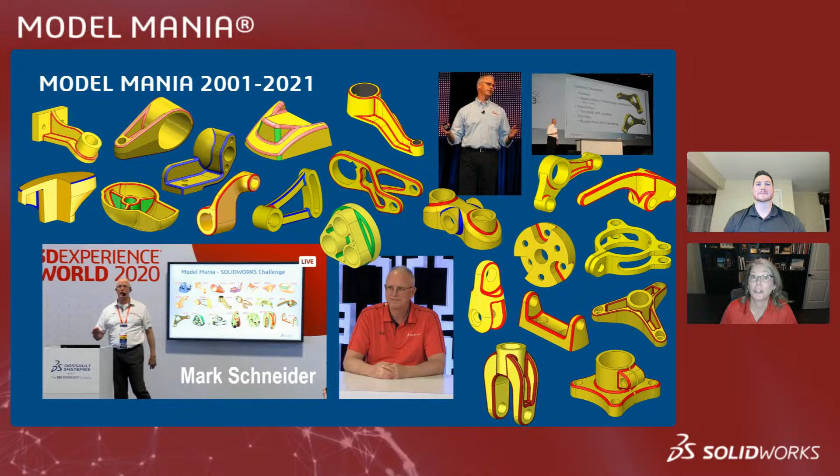Here's an example of one of the drawings that Mark created. We've got phase 1, showing what it looks like at first. Then as soon as you're done with that, you get the scary phase 2, where you have to go make a change and make those edits to the model. It was a lot of fun and fantastic. At the end of 2021, Mark retired and turned the reins over to me.

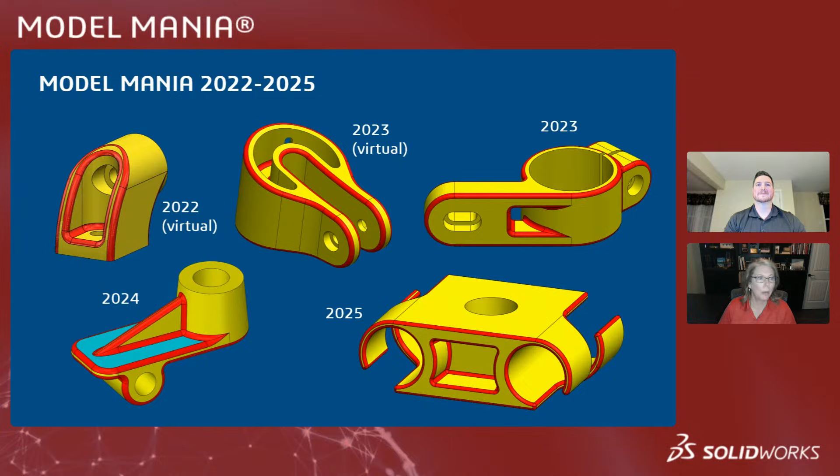So these are the models we've had over the past few years. We've continued on with Mark's system of having users and resellers categories. And this year in 2026, we're adding a third category for students. So if you're a student in university, college, or even high school, and you want to try Model Mania, you'll be competing with your peers. We're excited for that.

I thought I'd give a quick shout out to last year's winners—these were the winners of the 2025 challenge. Just as a reminder, you get cash prizes by taking the Model Mania challenge at 3D Experience World in person. We don't have cash prizes today, but if you attend 3D Experience World, you could win there. I thought I'd show a quick shot of the booth at 3D Experience World last year in 2025—this is before things got wild and all the customers showed up.

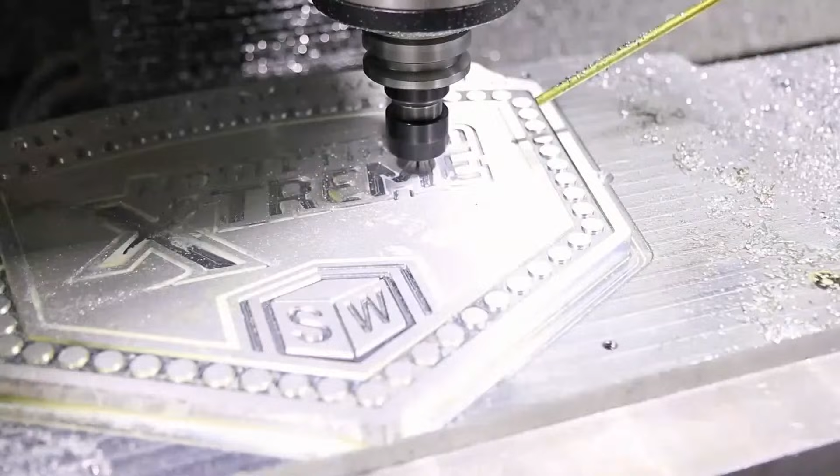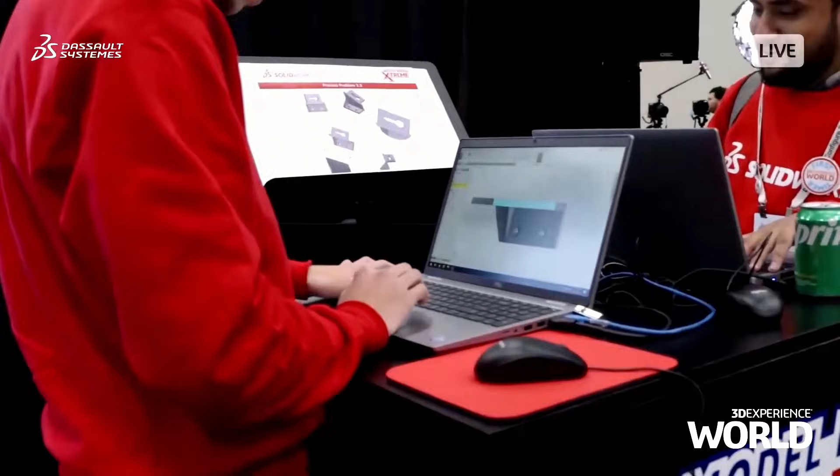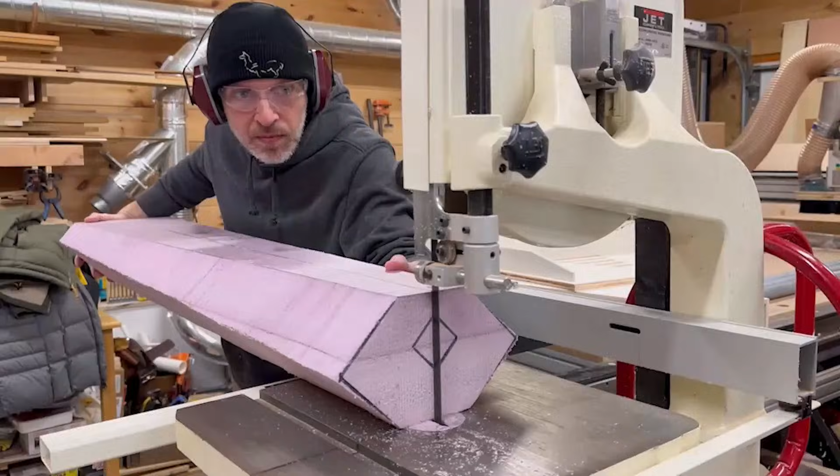Live at 3D Experience World 2025 in Houston, Texas: Model Mania Extreme! Powered by xDesign, designers step into the ring to go head-to-head in epic speed modeling challenges. Users, partners, and experts battle in CAD using SOLIDWORKS design tools. Winners earn their moment of glory, flaunting the Model Mania Extreme Championship belt. The ring was imagined in SOLIDWORKS xDesign, sponsored by SendCutSend, and brought to life by the talented, passionate team at Our Next Make. I promised if I ever met you, I would control, delete you. Oh, let's get ready to model!

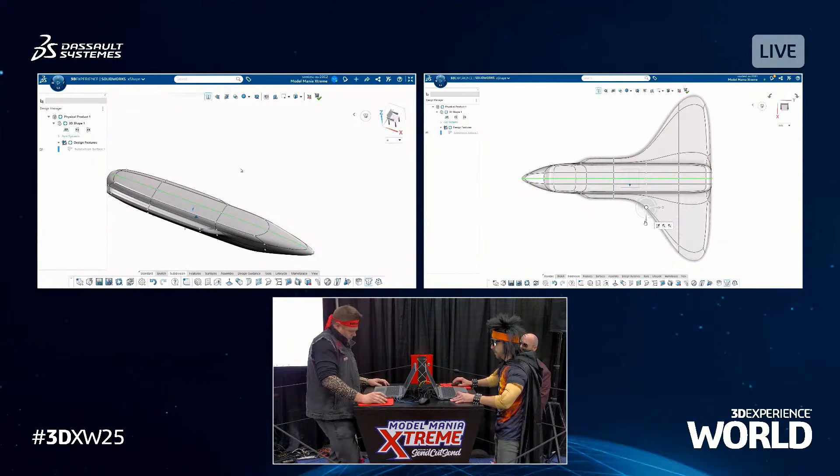Heavyweight surface modelers went head-to-head in the Sub-D showdown. These experts battled using the freeform subdivision modeling tools in xDesign and xShape. Competitors had only 20 minutes to model something extraordinary. We've got a winner - it's the Surface Slayer! I can model anything in this there world. He can model anything! Join the action with us when Model Mania Extreme returns to 3D Experience World 2026, back in Houston.

Yep, Model Mania Extreme was quite a bit of fun. Back to normal mode now. Ryan, I know one of the main reasons we've got so many people joined in today is because they know

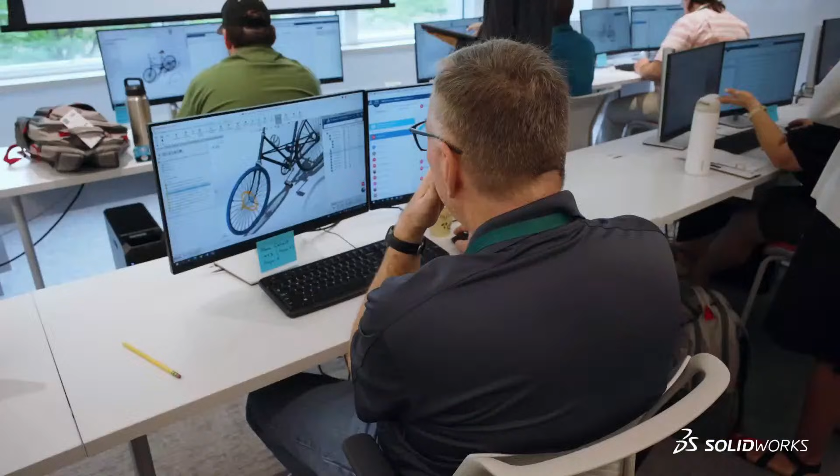The community of more than 7 million people who use SOLIDWORKS demonstrate a level of passion, love, and loyalty that is normally reserved for your hometown sports teams, or maybe your favorite racing driver. So, what is the SOLIDWORKS community, and what makes it so special and so unique? To understand the passion and love, you need to fully experience it. You might talk to a designer or engineer that's made their living or advanced their career using SOLIDWORKS, or attend a SOLIDWORKS community event where you see people running to get seats in the front row, loudly cheering for the latest product enhancements.

This group understands the value of gathering with other users to network and learn from each other. They find and create interesting events that keep the entire community engaged. You could even hear product leaders discussing their commitment to improving the software based on user feedback, or learn about how SOLIDWORKS plans on pushing the envelope with what's possible in the future.

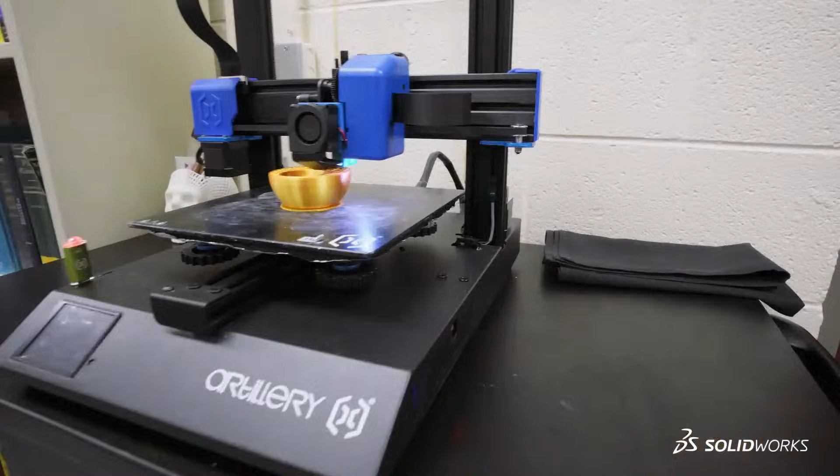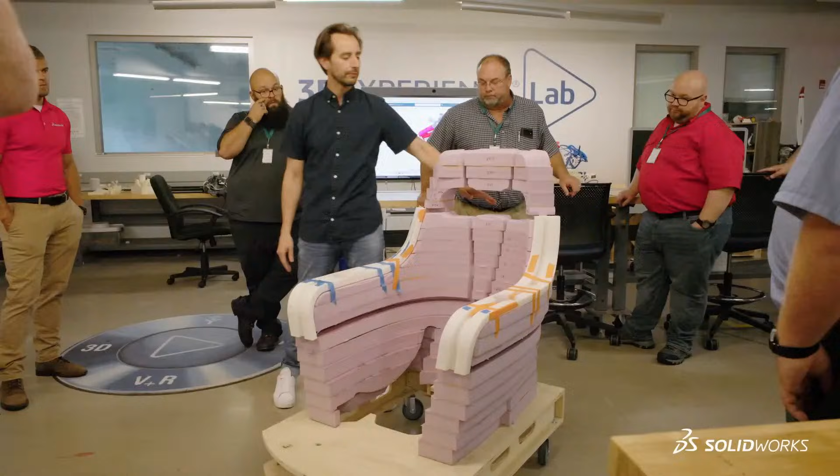So, how did this remarkable community come together? The SOLIDWORKS community contains some of the most passionate and creative people in the world. Designers, engineers, makers, analysts, and more all use SOLIDWORKS to bring their ideas to life with an accurate and realistic 3D file. The community is full of people from aerospace, infrastructure, life sciences, transportation, high-tech, and much more. These individuals are the architects of tomorrow, designing a world that is smarter, more efficient, and truly transformative.

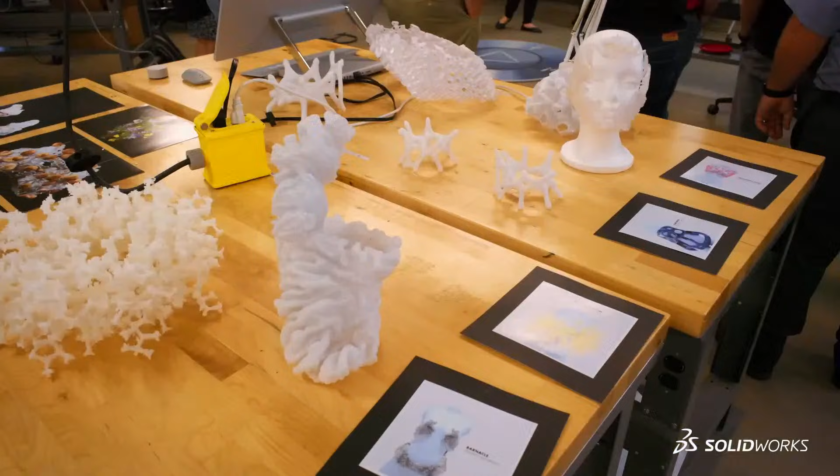But the SOLIDWORKS community is more than just a group of individuals who use the same software. It's a supportive and collaborative ecosystem where passion, creativity, and innovation intersect. Together, community members push the boundaries of what's currently possible, inspiring and empowering one another to create a better future.

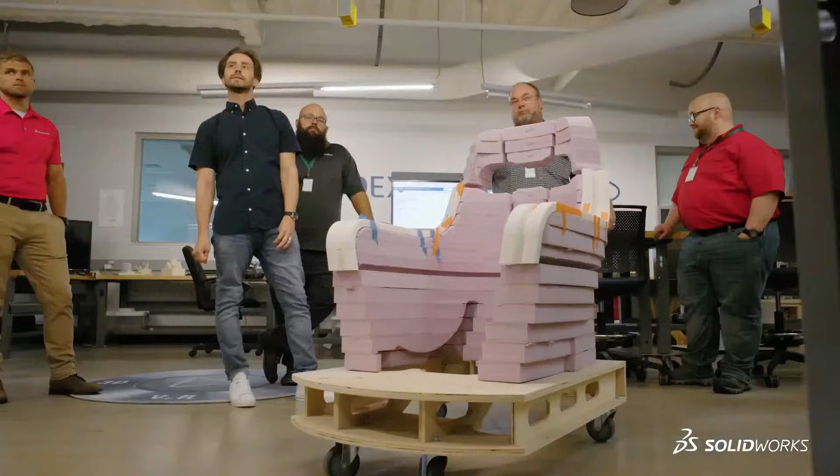So, are you ready to join the SOLIDWORKS community? You can get started by visiting the SOLIDWORKS user forum or finding a local SOLIDWORKS user group. Or you might consider starting your own user group or even becoming a SOLIDWORKS champion. We'd love for you to join us and find out for yourself what makes the SOLIDWORKS community so special.

All right. I think it's just about time, right, Ryan? We are ready. We're going to talk through how to win, how to participate, and how to win the challenge on this page.

So if you haven't already, go to solidworks.com/modelmania, and you will see, if you scroll down on the page, submissions are now open. Go ahead and click submit results. Start filling out your information for your name, your country, what best describes you - you got to click that checkbox to accept - your first name, your last name, your country. We need to know what division you're in as well. The email address - keep in mind, the email address you use here is going to be the one that we assign the CSWA voucher to that associated account. And then on the next page is where you can submit your mass in grams to the nearest 0.01 gram and the solid part file or 3D XML for the final part.

Ryan, am I missing anything? Does that just about cover it? That's just about it. I think we're... I think the chat looks like we're ready to go too. I think we're about ready to go. Do you want to count us down? I think, let's do it. Let's start in 5, 4, 3, 2, 1. Let's get ready to model.

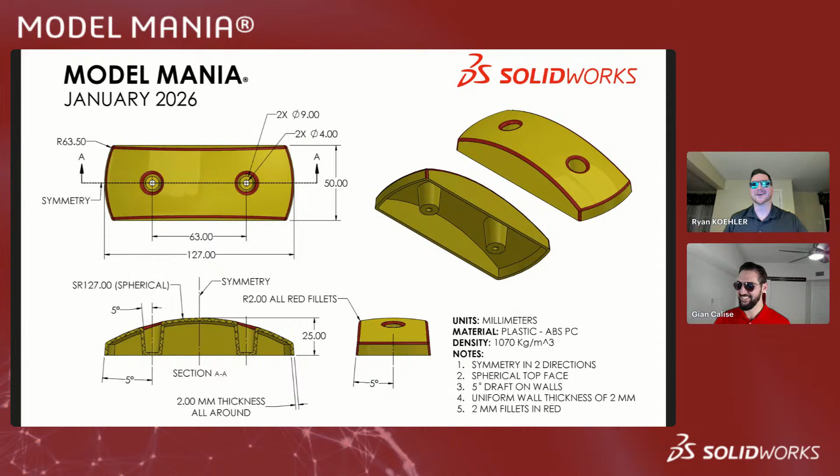Where's that drawing? There we go. Today's challenge - there it is. All right, everybody, fill out the form and get going. We will see you shortly.

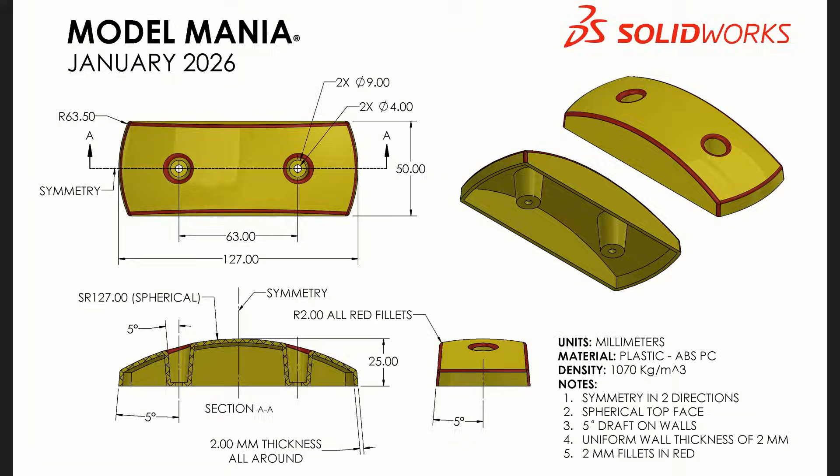All right, we're back. We're back. Oh, Gian, sorry, you can't even hear me right now. We can hear you now. You can hear me now.

All right, we've got our winner. Before we share who actually won, I'm going to step through the model step by step. Remember, there's always multiple ways to create the part in SolidWorks. There's always many ways to do things. I started with a simple revolve.

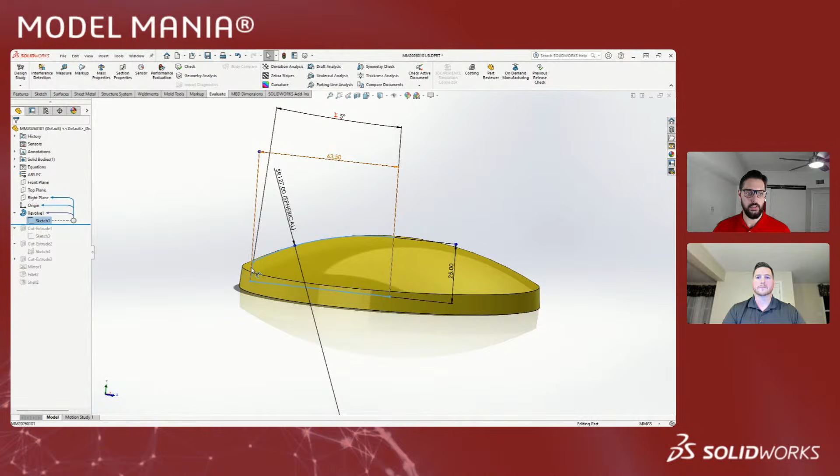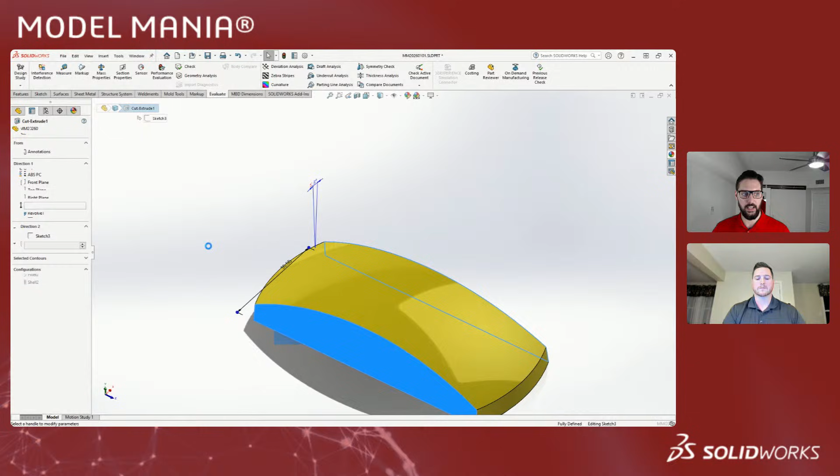We had a very simple profile with our arc, with our angled line right here at the 5 degrees. I used global variables throughout just to make my life easier for the 5 degrees of draft. And then I used an extrude cut with just a very simple rectangle. But you probably noticed, I just sketched the rectangle. I ended up using the flip side to cut option with drafting outward by that 5 degrees, and once again using my global variable. And that just cut away everything that I didn't need from this.

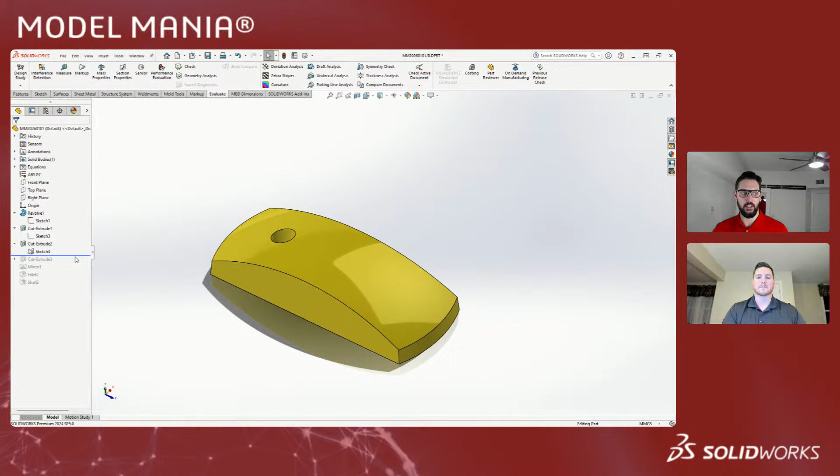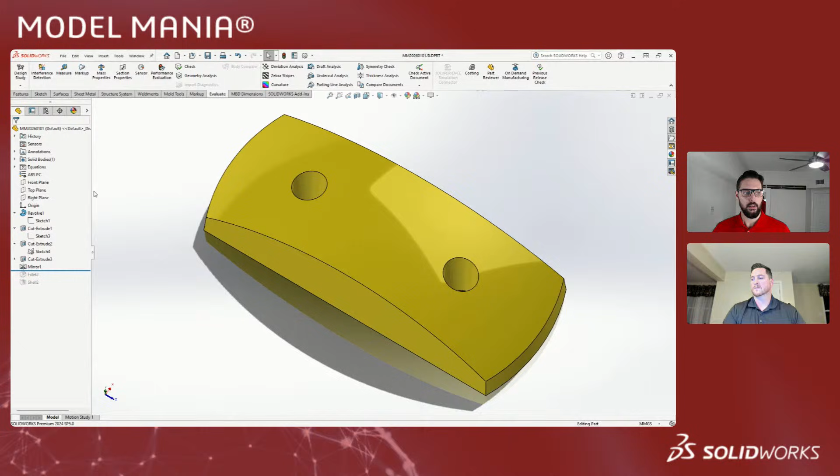So whenever we have a spherical face, typically a revolve is going to be the easiest way to incorporate that geometry. There's always multiple ways - we saw some people actually use surfacing commands, which is amazing. And then simply cutting a couple holes in this, one with draft that has our 9mm base, or our diameter at the base, and then a 4mm through hole going through it. We mirrored that to the other side of our part, using our front plane that cuts through this. And then we added our 2mm fillets, as you can see in red everywhere. And finally, of course, we need to make this a uniform thickness - we need a uniform wall thickness of 2mm going around this entire part.

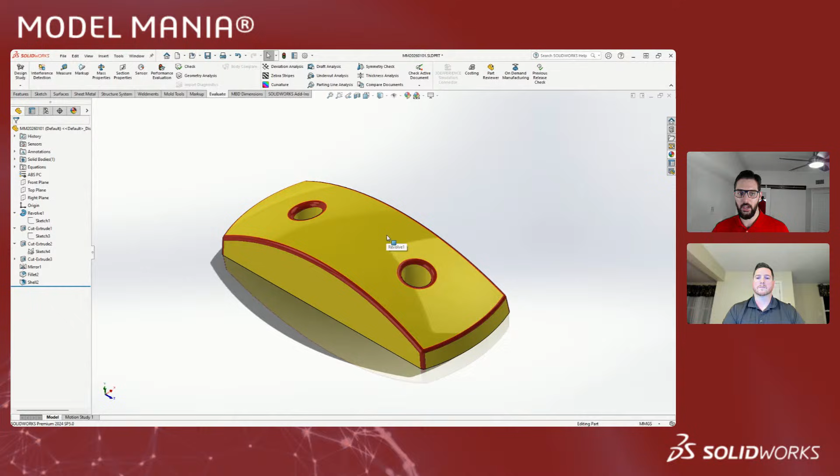So we use the shell command. Some key takeaways for this part: draft is a very important feature, knowing how and when to apply it in your different features, or you could have just used the draft feature after creating the base geometry. The other thing is the revolve, like we talked about, is a great way to get spherical geometry. And finally, the shell was an important step in being able to quickly turn this from a solid into a uniform wall thickness part.

And without any further ado, let's switch over and announce our winner, Mr. Adon Isaias, or Isaias, I hope I'm pronouncing your name correctly, but either way, you are the winner, Adon. Thank you so much for competing in the challenge, for winning the challenge, coming in first place. How long did it take, Adon, Ryan, when we were looking at this?

I think it was just over 7 minutes. Yeah, that's incredible, 7 minutes to create this part. And we had a runner-up as well, too, right? We did. Just over a minute longer, maybe a little less, was actually Tom Smith. So we want to give a shout out to Tom Smith as well. Also got the answer perfectly right. Amazing. Congratulations, Adon. Great job, Tom.